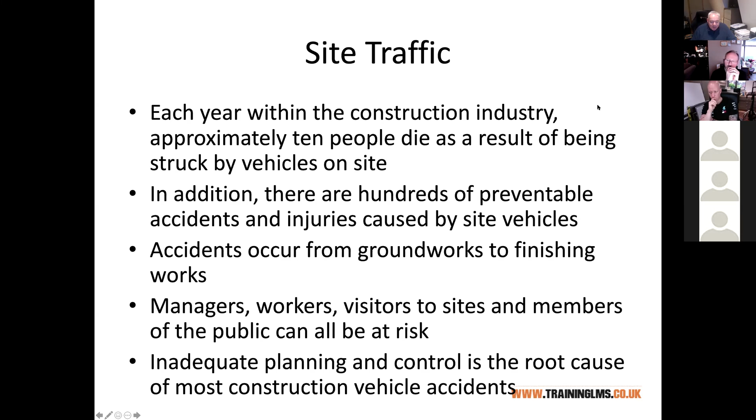So that's a little bit of the background in terms of why site traffic is such an issue. Let's talk about some things we should ensure happen to make sure we minimize the risk of those accidents from happening.

Segregation is going to be one of the most important things that you look for if it is possible on your site. The more we can keep people away from the machinery and the vehicles, the less chance there is of an accident. Most transport accidents on site result from inadequate separation between people and the vehicles.

And again, you can see how that comes back to the design stage - being realistic about where people are going to be walking, what our routes are throughout the site, where people will be walking from canteens, site offices, fabrication areas, storage areas, toilets, welfare facilities, where vehicles are going to be going, and how much we can reasonably segregate those two, and how we do it.

Now, it's nice and easy for me to sit here today and show you nice pictures and drawings of big sites with lots of room. I recognize many of you will have been involved in jobs that are absolute nightmares, where you've maybe got a tiny space to work in and lots of work going on.

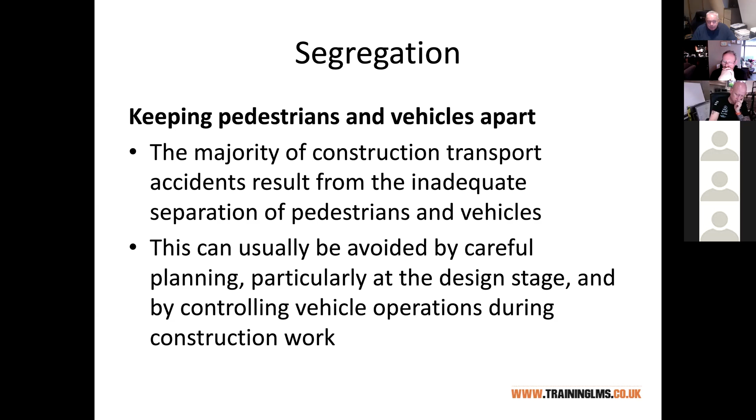The bottom line is you do the best you can, but what you can't do is ignore it. So in terms of segregation, we start by looking for the best that we can do. Are there sections of the site where we can physically segregate pedestrian routes and vehicle routes? Exactly the same way you'd approach a road layout in a housing estate or a town centre, where we have a footpath and a road and crossings and signage, providing as much information for people as possible. So we're looking for segregation.

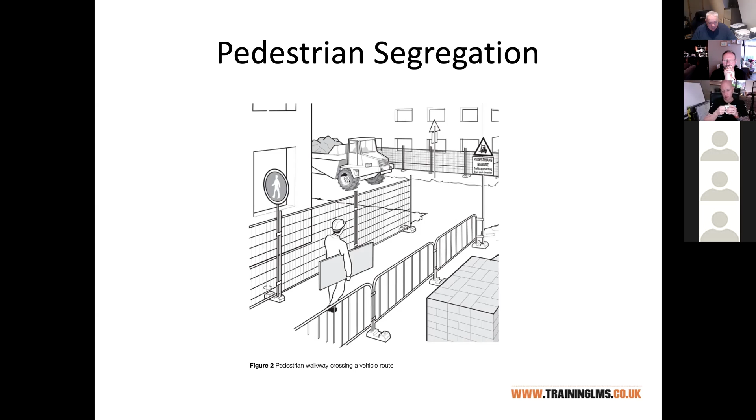Ideally that segregation is some sort of barrier. We're not talking about just a little bit of multicolored tape here and there. We invest in some sort of suitable fencing or barriers.

Just some photographs of good practice you can see. Again, not every site is going to justify the expense of this. I get that, I understand that, but you've got to weigh it up. You've got to do a risk assessment effectively to decide how in depth you need to go on any particular site.

So here is obviously a large site that's going to be up for a considerable period of time, with a lot of people moving around, but also a lot of site traffic. They've invested in robust physical measures, as we have here: baulk timbers, proper handrails, ballasted traffic barriers, a bit of scaffold guardrails and so on in places as well.

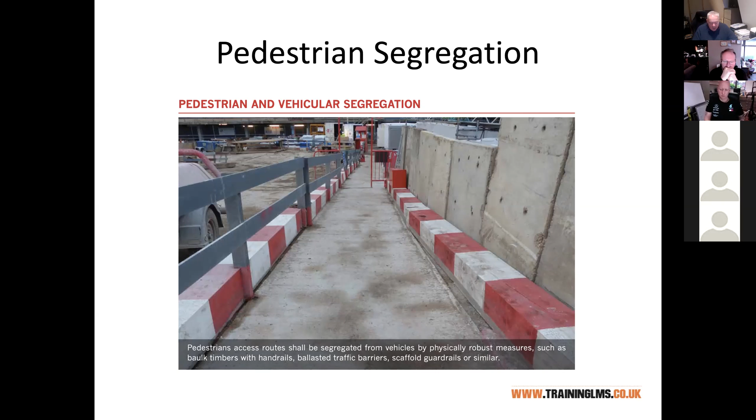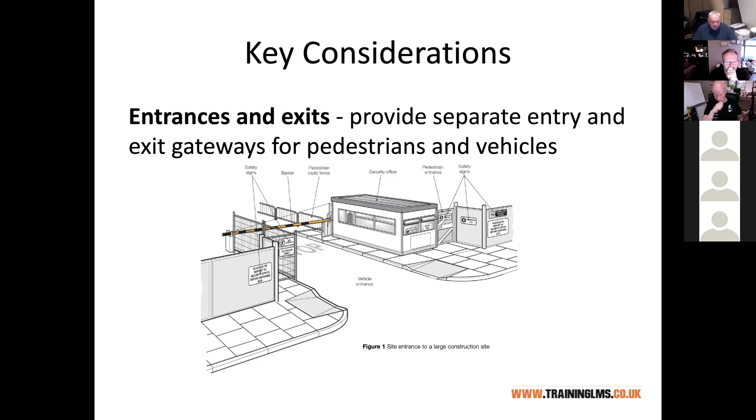In terms of where you're asking pedestrians to actually travel across the site - it's a relatively minor type of injury, but one of the most frequently entered in the accident book - that is slips and trips. Construction sites are uneven, we're digging stuff up, moving stuff around, storing materials, but as much as we can, we want to try and provide firm, well-drained pedestrian walkways that give as direct a route as possible between the different work areas. There are different formats of that.

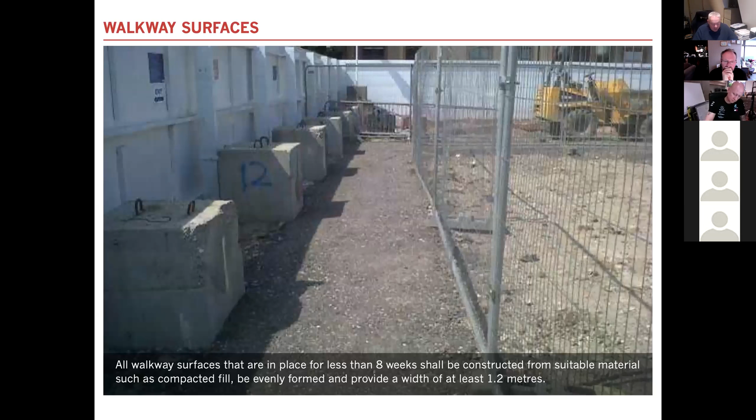Now this is not what the law says, but this is one particular large UK contractor's own rules. For example, if it's a walkway that's going to be in place for less than 8 weeks, they'll do a walkway with compacted fill, with a width of about 1.2 meters. If it's going to be in place for longer than 8 weeks, they'd generally put some sort of temporary concrete or tarmac down, nice and evenly formed, again at least 1.2 meters wide.

Again, I'll emphasize, if you've got the budget and the space to do this, that's what you're looking at. It's not a case of you have to do this on every project. I will say that doing stuff like this has more benefits than simply segregating pedestrians and providing a level surface for them to walk on.

We all make a judgment the moment we walk onto a new site, as in, does this look like a professional site or not? And unfortunately, we also partially adapt our behaviour to what we see. So if we see a slightly lax, more laid back type of construction site, chances are we become more lax and laid back ourselves.

If we walk onto a site that's clearly organised, there's good precautions in place, they've done a bit of investment. It makes you feel like, right, they're taking things seriously here, I need to do that as well. So there's a psychological element to doing all of this.

There's also a link to quality. If a group of subcontractors arrive on site for the first time and see something that looks the part, something that's had investment, straight away they're thinking this is a site that will expect me to be doing my best, doing a high quality job. So there's more of a knock-on effect than simply the immediate that you might see.

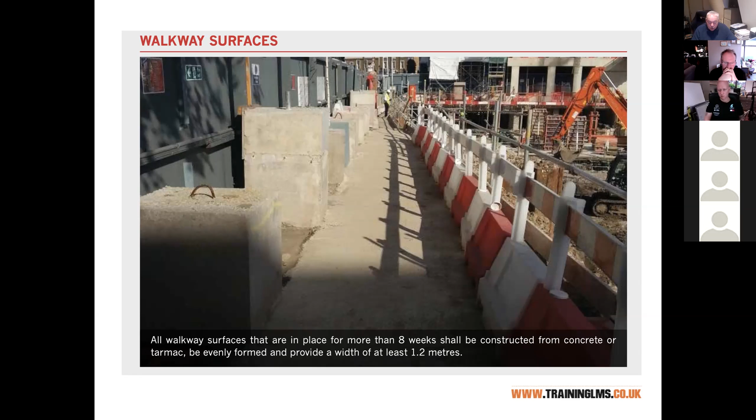Whatever materials we use for segregating people, in a case like this where there's materials either side, you might get away with proprietary tubes and some mesh, as I've done here. If that had been closer to an area where vehicles were going, you might need something more substantial like temporary concrete bollards or baulk timbers. So you've got to look at different walkways from different perspectives.

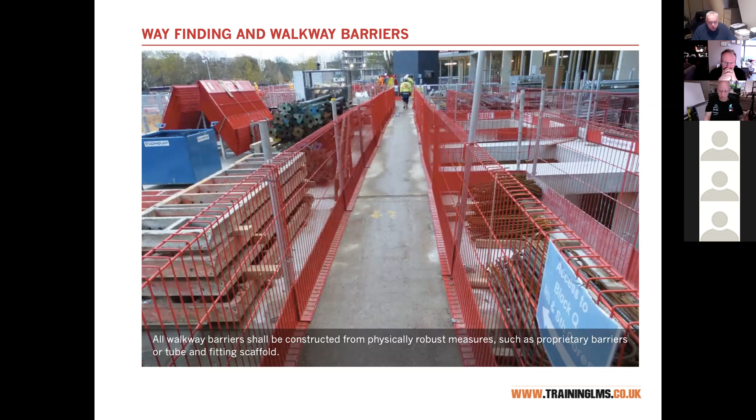We shouldn't forget, particularly in large buildings, about indoors as well. Particularly in multi-story buildings, we tend to end up using the multi-story areas as we build for storage, for fabrication, and so on.

This is what I mean about a construction site changing from one day to the other. We need to give some thought to our evolving plans as to where our walkways are, what we're going to do to protect them, and how we're going to mark that.

A company I know well and used to do some work for were converting an old, very large bakery premises into apartments a number of years ago, and they had a very unfortunate fatality with a telescopic handler reversing in a basement area similar to this. It was being used as part store, part fabrication, and unfortunately the driver didn't see somebody behind him. There was no walkways, no segregation, poor lighting and so on, and unfortunately the company learned a lesson in a very difficult way.

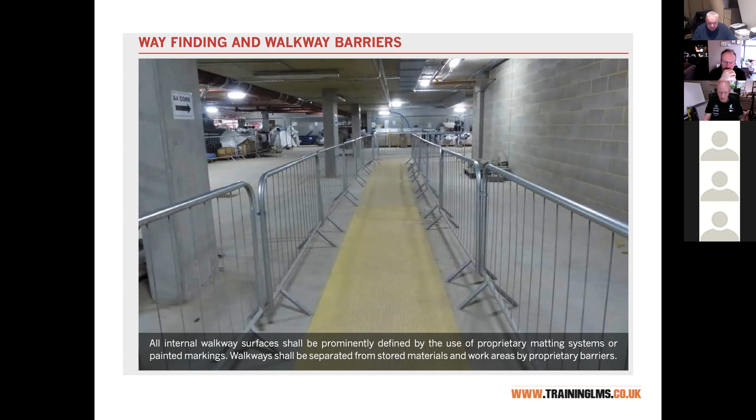Talking about sites changing and evolving, sometimes we need access routes temporarily to areas, so we might have to deviate off to access areas we're doing work in - maybe drainage work, maybe connections. So it's not just about getting people safely across the site on the level.

We sometimes have to get people up and down safely, whether through temporary ladders or temporary staircases, steps taking us up and down. There's no point doing 90% of the walkway to perfection and leaving the last few metres for you to have to climb over something or drop down. You need to get people all the way safely to where they're going to be working.

Even on the largest site, you're going to have points where pedestrian and vehicular traffic cross over each other and interact. So plan your crossings - think about where people are going to cross traffic areas, and put clear signage up.

Going back to the fatality I told you about, lighting played a big issue, whether it's the pedestrian seeing the machine or the operator seeing the pedestrian - understanding where the two are likely to interact. And the simple things: visibility, not just lighting but our high-vis clothing. It's called high visibility for a reason - it's to give people a chance to see you. So the temptation of 'do I need to throw this on' even if I'm just spending a short period on the site - it's there for a reason.

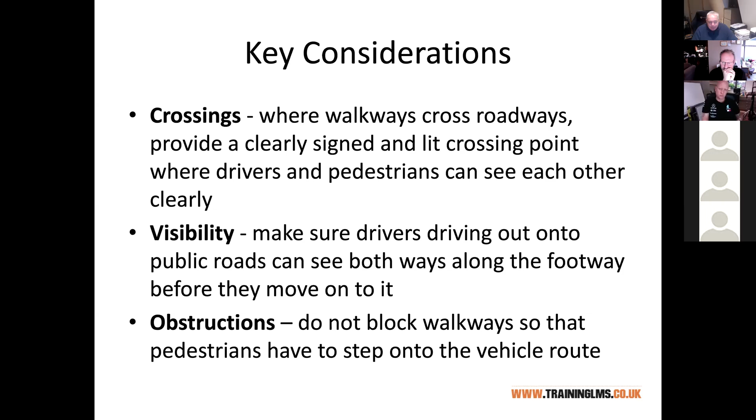And I have to say, fair play to them, they've done it very well. They've put temporary traffic lights in, and crash barriers to divert pedestrians, even though it's quite a quiet road, out into a safe area. We will get situations where walkways are obstructed, so we need to keep an eye on that to try to make sure they're not obstructed, because that forces people out of the safe area.

So you might have a situation where you've got a large site like this, with barriers, and a point coming out from the right-hand side would be the site office, with a barrier that will remain down as long as people are walking back and forward there. There's little speed ramps to remind people they're going over an area where pedestrians are walking, and there's plenty of signage and speed limits.

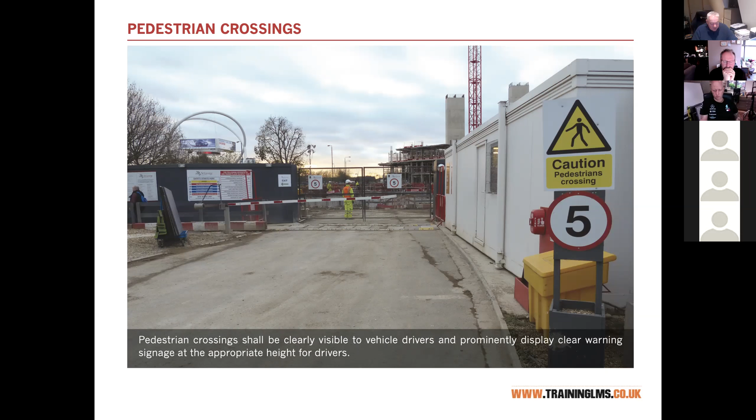So whatever way you do it, it should be well thought out, with plenty of signage and warning for people. Also, sometimes there's temporary works going on site, things about how a site can change so quickly. Perhaps there'll be piling rigs moving around a site, and in that situation people are lazy, people look for shortcuts. Sometimes we have to physically put barriers up to stop them coming into the danger area.

It could be piling operations, excavations, or lifting operations. Whenever we've got dangerous activities like that taking place, we need to warn people via signage, and potentially put physical barriers to actually stop people from going.

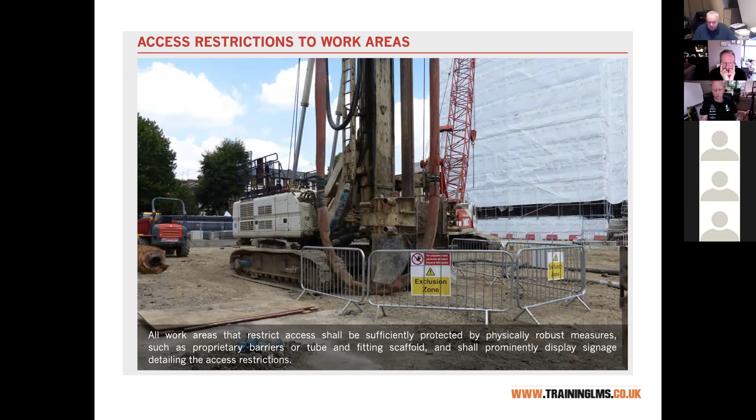Those of you who've viewed the accidents webinar I did, if you remember the example of the forklift - we put signs up and say don't walk here, but people ignore signs. Let's be honest, sometimes we have to put physical barriers. That's why in a warehouse type environment where you have forklifts operating, you'll recommend actually putting in physical barriers that separate pedestrians from the machinery working there. Temporary freestanding fencing like we have there is not expensive and very easily moved around sites.

Another situation where we need barriers - many of you will be familiar if you've ever had excavation or large plant moving around on site where you've got live high voltage overhead cables. In those situations you will limit the areas where vehicles can pass under the cables. You'll put barriers - whether they're barrels filled with concrete, or you use excavated spoil on the site to create barriers - but you have designated points where machinery can pass safely under the height of the goalposts to move from one part of the site to another.

We did have a project scenario a couple of years ago, a new housing development, with high voltage cables running right across the corner of the site. And of course we did a risk assessment and method statement on that.

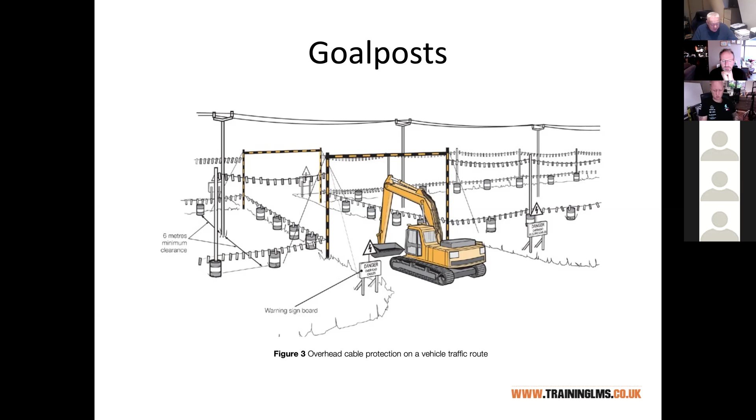Now I've signposted quite a bit of guidance here. I don't intend to go through this point by point - it's not necessary because it's very straightforward to read and understand yourselves. But HSE provides some really good guidance about site traffic, site transport, and the rules and so on.

You can see in this particular one it talks about different types of sites - what if you've got contaminated land or a muddy site, what if you've got restricted visibility, what if you've got temporary structures like LPG storage areas or overhead cables, what if you've got a site with roadways close to excavations, pits, or watercourses - and it tells you the control measures. So if you had any of these situations, there is very good guidance, or if you had an assignment question asking you to deal with these situations, those are some of the control measures to consider.

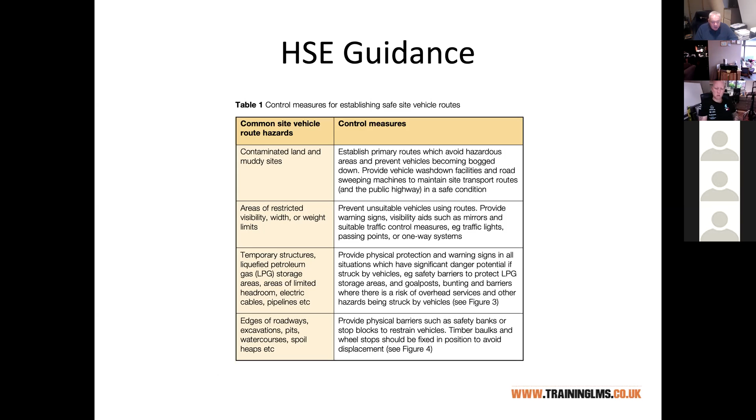For example, the last one talks about what if your machinery or vehicles on site have to pass close to excavations - many of you will have seen this on site. There are different things we can do, physical barriers for example, that we can erect to prevent vehicles from getting too close to it.

Over the years I've seen a number of nasty cases where plant and machinery has slid down into excavations. When I was in consultancy a number of years ago, there was a fatality on a project involving a dumper that slid down into a deep excavation. Again, it's easy to learn the lessons afterwards - it's better that you think about these things in your planning.

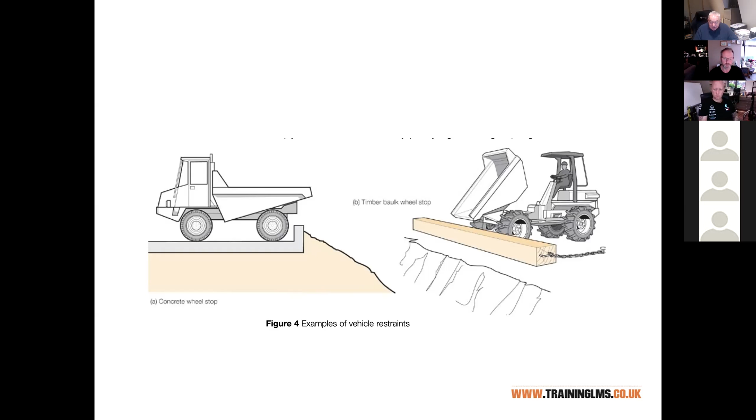So in terms of ensuring safe site traffic routes, it gives you some suggestions to think about both for vehicles and for pedestrians at different areas, all of which you have to consider when planning a site setup.

There's the entrance and exit, that's very important. There's parking areas—let's not forget that in this day and age, most people travel to site in a car or van. There's a limited amount of sharing, and ironically COVID has made that worse, since some guidance tells people not to share vehicles and come to site on their own if at all possible. So we have to think about whether we've provided adequate parking.

There's no point putting our head in the sand over that. If we just ignore it and tell people to park where they can without worrying about what happens outside the site, we're going to have complaints, double parking, and difficulty getting deliveries in. So we need to consider what levels of parking are needed, and where, whether for people working on site or for people waiting to offload and deliver.

We're going to need an area for offices and welfare facilities, with people walking between those and the site area. We need to consider our primary traffic routes for bringing materials and machinery around the site, and there might be secondary routes used less often. We might have storage areas, loading and unloading areas, and areas for maintenance and cleaning of vehicles, like wheel washes.

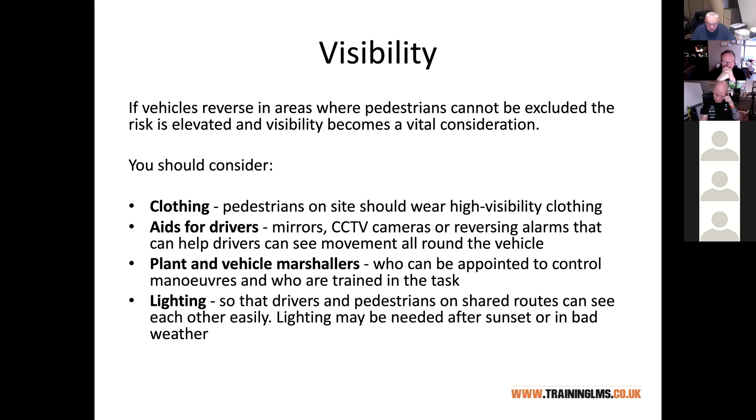In terms of passing information to people, we should have site rules, traffic rules as well. That should be clearly up, both in terms of people made aware at induction, and also in terms of signage. And signage should mirror road signage. All of us who drive should understand standard, whether there are no entry signs or speed limits and things like that. So we should use similar types of signage so it's easily understood by everybody.

So just to tail that little bit off, folks, in terms of the dangers of traffic and so on. Generally, how that would translate into an assignment question for you would be to actually get you to produce some sort of site layout and a traffic management plan.

You don't have to be proficient in CAD or something like that. It's perfectly acceptable to print off an A3 or A4 copy of the site plans, mark it up yourself using good old-fashioned coloured pen and ruler, then scan it and upload it as your answer. But if you have software or you're familiar with marking up site layouts, that obviously won't do you any harm either. So that's the type of thing we've seen in terms of questions asking you to produce a site layout.

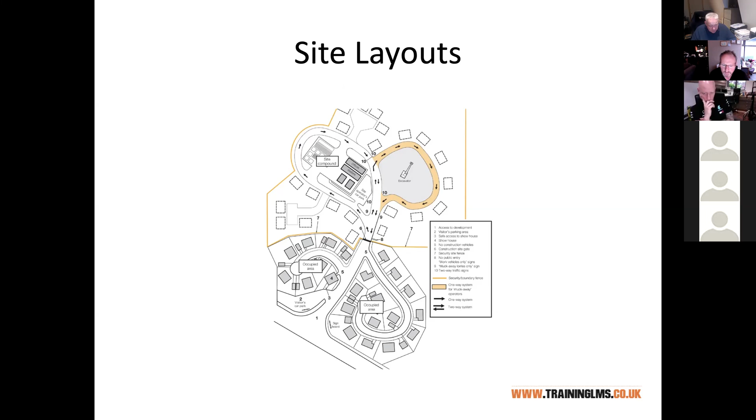Obviously, the one I have on the screen is for a housing scheme, showing phases and so on. Last year, as I mentioned, we had a very tight city centre site, which presented more difficulties. We had to be creative and use the basement for storage. Once the basement was constructed, we had to even put the site accommodation in that as well.

But if you do get this year, you've got plenty of information there, and plenty of room to work on. As you're getting the gist of now, you can make whatever assumptions you wish, since it doesn't tell us where the site is, how close to main roads it is, or whether there's good public transport and parking facilities. You make those assumptions that suit you best. So that would be my guess.

If there was a question around this next June for you, it would be to ask you to produce some sort of drawing. If it's a topic you're good at, drawings can be quite useful because it removes the need for you to do 2,000 words. I would always suggest, even if you're submitting a drawing, that you put some form of text along with it, your methodology, some form of explanation as to why you put stuff where you did. But it does mean you wouldn't be looking at a 2,000 word question.

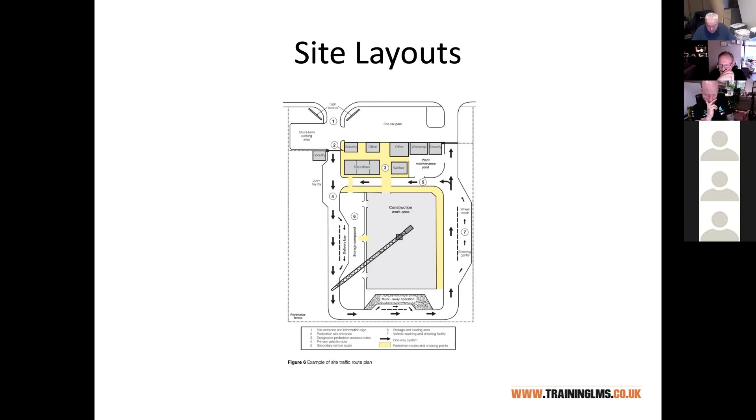Okay, so that's traffic and site layouts. A couple of shorter ones just to finish us off then on this: health and safety management systems.

Truth time here, folks, this has never come up as a question. Doesn't mean it won't - in 10 years since they rejigged the course last, health and safety management systems has never directly come up as a question. However, I do not want to be sitting in June and an element of it does, and you go, Roger, you didn't even mention that during the course. So just very briefly to give you an overview, and hopefully to get you thinking a little bit about how health and safety management systems might work with yourself and how you operate them.

Health and safety management systems are a framework that can give you some confidence that you are doing everything you're supposed to be doing. I'm sure most, if not all of you, will be familiar - there's all sorts of management systems out there. We have quality management systems, environmental management systems, and health and safety management systems.

For example, it used to be OHSAS 18001, it's now called ISO 45001. You might have standards to meet to get on frameworks such as CHAS, which is part of Constructionline, or Safe-T-Cert, which particularly in Ireland is a recognised health and safety management system. Or indeed, your company might just have a big written set of procedures which effectively form your company's health and safety management system. Or indeed, I imagine most, if not all of you, will have a health and safety policy - that is a major part of any health and safety management system.

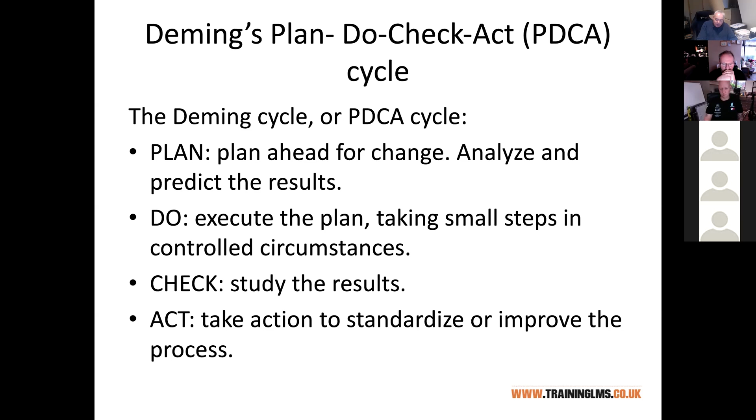Nothing in life ever goes 100% to plan. So we check it. Okay, that didn't quite work. So what do we need to do? We need to act. We need to take changes to try and improve it. And that is a continual cycle that you have within plan, do, check, and act. And those are the sort of little diagrams that work very nicely dropped into assignment questions as well.

So that happens continuously. Doesn't matter if you're stuck in an office all day or out on site. Whether you realize you're doing that or not, you're all doing that. You're all thinking, what am I going to do today? Right, then you go out and do it. Then you say, I wanted to get all of this done today. I don't think I'm actually going to be able to do all of it today, so I might have to rejig what I'm planning. And you continually do that. You do that with health and safety management systems as well. It's not like what you write on day one of your planning is going to be written in stone for the rest of the job. You've got to be flexible and you've got to adapt to the circumstances.

Then you've got to, like in any team, give responsibilities to different people. Not everybody's doing the same thing. Not everybody's responsibilities for health and safety are the same level. You have some people who do more things than others. Right, Roger, you do the risk assessments. Alex, you'll be our first aider. Dean, you'll be the person who does accident investigations. So we go and train those people to be able to deal with those specific things.

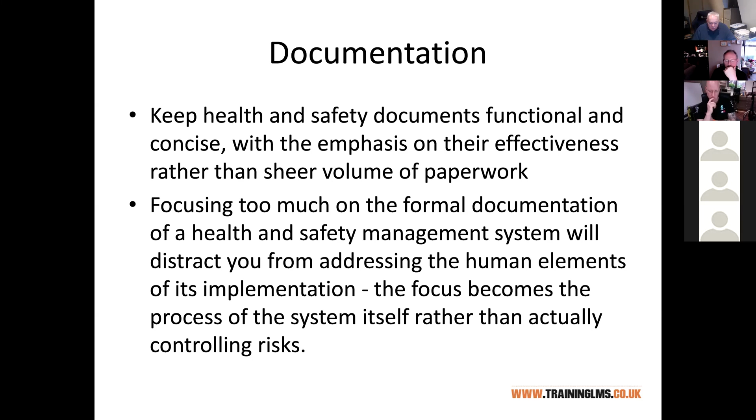So again, I'd say with health and safety management systems, it's not just about having the system, it's about how people buy in, again just like a sports team. You can practice, train, and have a whole regime in place, but it's about people's attitude, how people behave, the buy-in, and we talk a lot about safety culture, and that is a key part of a manager's role. Often it's left to a health and safety person to try and implement all of this, but for it to work in any organization, we need buy-in from the management team to make sure everybody plays their part within a health and safety management system.

And the two words, if you take two words away from health and safety management systems, the two words you'll hear most is continual improvement. You never get to a point in health and safety where you go, that's it, I've got to where I need to be. And again, my last comparison to a sports team, the team that does well and thinks we're at the top of our game and we don't need to do any more will be very quickly overtaken again. So you're always looking, it might be small incremental improvements, but you're always looking for something new in a health and safety management system.

Finally then, folks, for this particular webinar, I just want to mention welfare facilities. I have put a lot of information onto the slide here about welfare facilities. I don't intend or need to go through every slide in detail with you, but just to point out the key areas. If you want more information on welfare, the detail is in the slides, or if you get a question on welfare facilities, the slides would provide the perfect basis for you. What I will say is there hasn't really been a question on welfare facilities. It may be something you could possibly mention as part of another question, but I can't see a scenario where you'll get a question worth 2,000 words just on welfare facilities.

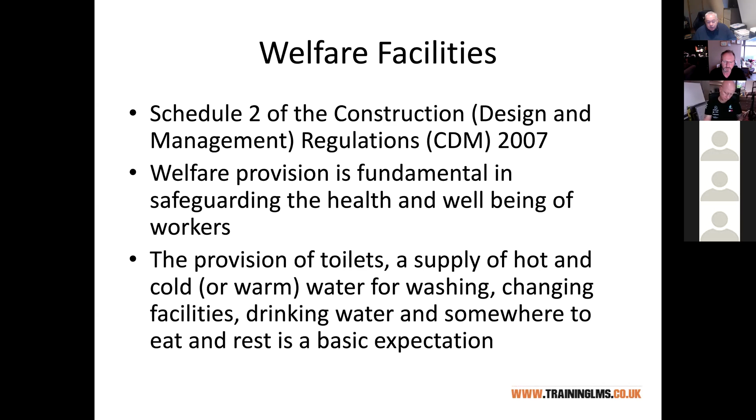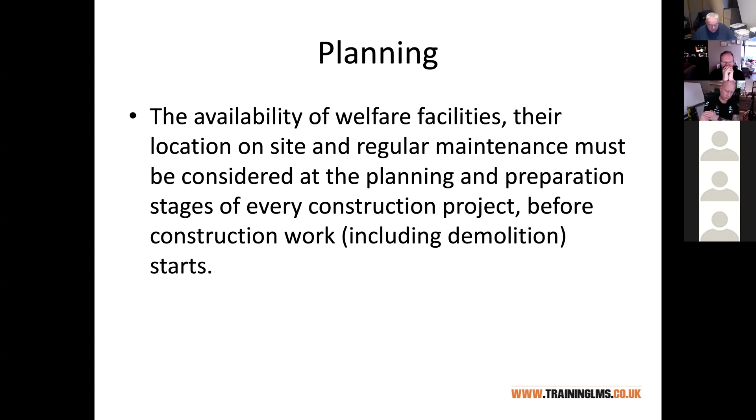We all have an understanding of what we mean by welfare facilities: toilets, hot and cold water, changing area, drinking water, and somewhere to eat and take a break. That's all a basic expectation, and it's also required under the CDM regulations, which I'm going to talk about again in January. As we're looking at this from a management perspective, it's about the planning. It's about not just making sure stuff gets thrown on the site and put together in a haphazard way. It's about, at the early stage before you've even started on site, asking what we're going to need, where we're going to put it, how we're going to maintain it, and making sure it's all in place from day one.

Will there be other considerations, like is there a lot of demolition work on this site? Is there going to be a lot of very dirty work like sewer maintenance? That might mean we would have to provide shower units, as an example. We can't just stick our head in the sand about this. What sort of distances will have to be travelled?

I visited a large waste to energy plant outside Edinburgh that a former student of mine was project managing. Huge big site, and one of the things he pointed out was the welfare facilities dotted right throughout the site because of its size. You couldn't expect everybody to walk back to a centralized welfare area all the time. They'd spend a good portion of their days traveling around the site, so we have to be realistic about that.

We have to be realistic about numbers. Numbers can fluctuate, as I'm sure you've experienced. Coming closer to the end of a project, there's maybe an influx of people, and will our welfare facilities be equipped to deal with that? Who's going to keep the welfare facilities clean and tidy, and how are they going to be kept up to scratch? Again, in terms of phasing, sometimes we might have to move the welfare facilities, particularly on a tight site, so how are we going to deal with that?

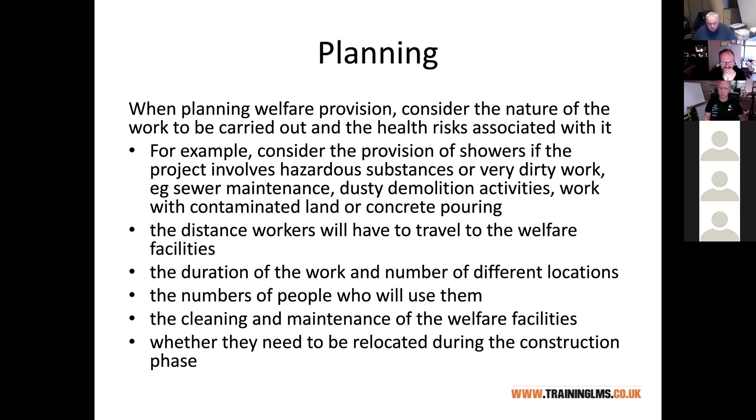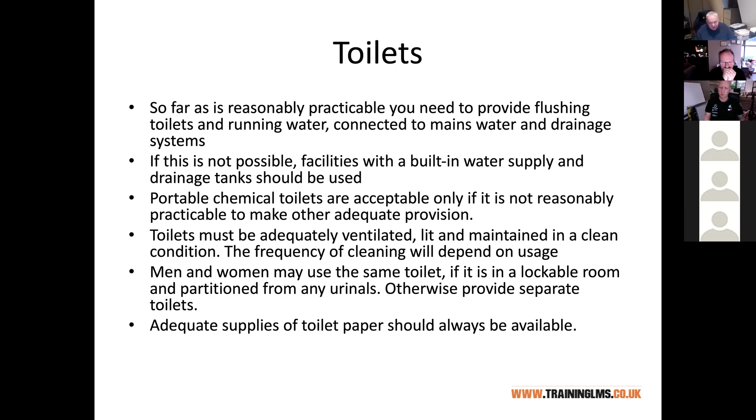I have details on each of these, though I'm not going to go through slide by slide. There's information there about our rules on toilets, how many of them, and about them being well ventilated and lit. There's guidance on washing facilities, having hot and cold water, towels and soap, and whether you provide male and female or unisex facilities.

We need a supply of drinking water, ideally direct from the mains, but if not it can be in containers or bottles, though it has to be kept fresh. We have to provide changing areas and lockers, because people come in needing a change of clothes, PPE and so on, so they need somewhere to put that.

We also have to consider any special requirements, where people might be wearing additional protective clothing, like wetsuits, or for things like asbestos work where they'll have their own decontamination units. We need to be able to dry wet clothing too.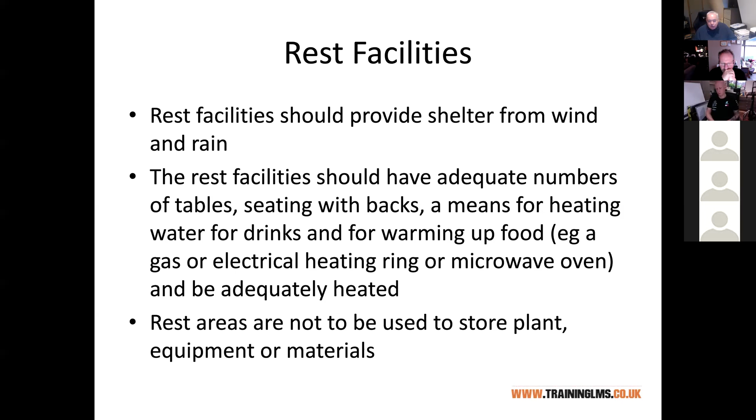I know a lot of people sit in their van and take their breaks, but that doesn't excuse us from the requirement to provide rest facilities, somewhere to sit and take a tea or lunch break, or to come inside particularly in inclement weather. Within that area there should be a way to prepare food, a microwave or kettle. I walk into many a site canteen and see stuff stored all over the place, but the guidelines say rest areas are rest areas, not to double up as storage areas.

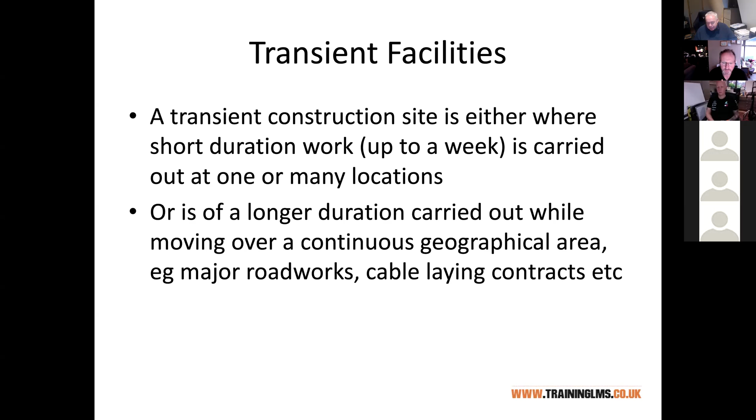We also have to recognise that some of you in construction aren't working in the same place every day, moving around for transient facilities, like maintenance work, short-term projects, roadworks, cable laying. There are still rules for that. It's acceptable to make arrangements for people to use existing facilities, for example if you're in somebody's house doing maintenance work, it's acceptable to arrange with the householder to use theirs, but that has to be clear.

If you're working in a shopping centre or an office, you can make arrangements there too. It's not a case of having to provide temporary facilities all the time, but as long as there's some sort of arrangement in place, that will be acceptable.

So folks, that is traffic management systems and welfare. That brings us to the end of that session, apologies for the short interruption in the middle. So, have we any questions, anything anybody would like to ask or add about the topics we've been doing the last few weeks?

Just a quick one on the asbestos, Roger. Has the Moodle site been sorted now? Because I still can't get a copy of the video.

Okay, the Moodle site has not been sorted. I got an email last night from Jo Bennett, the scheme manager, who's asked them to look at it again. It had been fixed and it has reverted back for some reason. For those of you who don't know, Moodle's had an upgrade in the last couple of weeks, and one of the things it's done is reset the size of file we can upload, making this video too large to upload. Hence my email about putting it on YouTube.